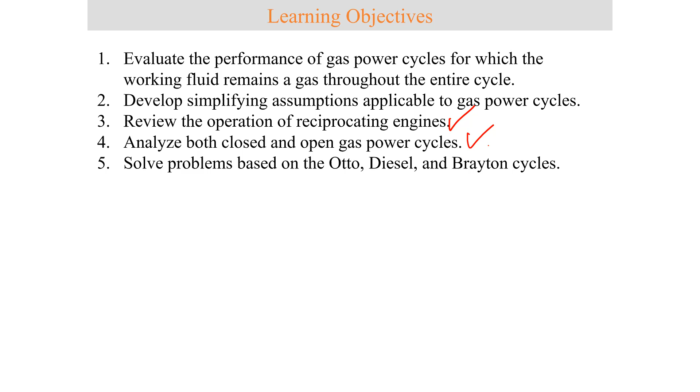We're also going to review the operation of reciprocating engines as well as analyze both closed and open gas power cycles, and then solve problems based on the Otto, the diesel, and the Brayton cycle.

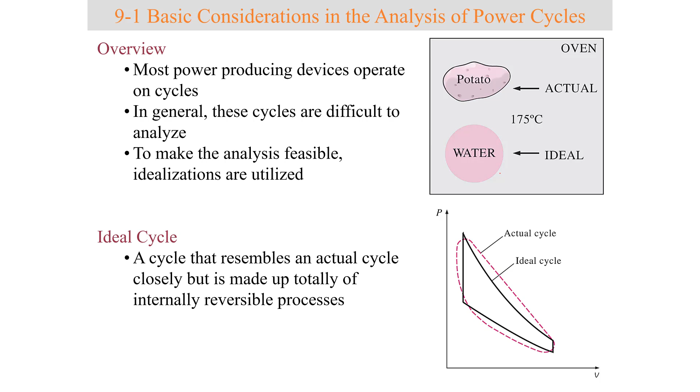So a little bit of an overview. Most power producing devices operate on cycles. In general, these cycles are difficult to analyze. So to make the analysis feasible, idealizations are utilized. The ideal cycle is a cycle that resembles an actual cycle closely, but it's made up of internally reversible processes.

If you recall, the thermal efficiency of a heat engine is the ratio of the net work produced by the engine to the total heat input. And then the Carnot cycle has the highest efficiency of all heat engines operating between the same temperature levels. No cycle can be more efficient than the Carnot cycle.

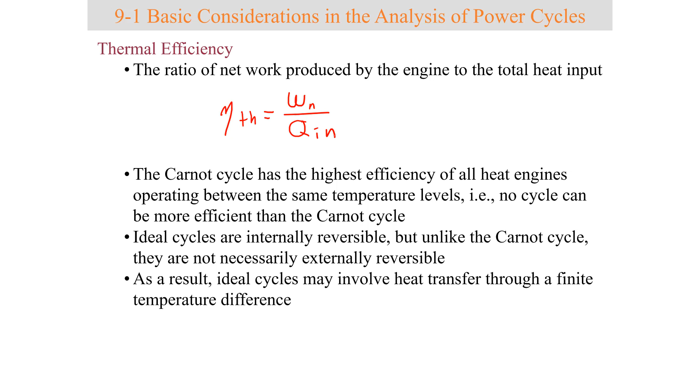Ideal cycles are internally reversible, but unlike the Carnot cycle, they are not necessarily externally reversible. So as a result, ideal cycles may involve heat transfer through a finite temperature difference. The following idealizations and simplifications are commonly employed in the analysis of power cycles. 1, the cycle does not involve any friction, so the working fluid does not experience any pressure drop as it flows in pipes or devices.

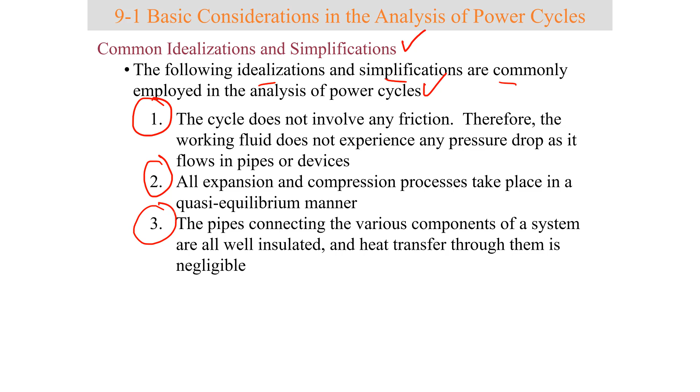Number 2, all expansion and compression processes take place in a quasi-equilibrium manner. And number 3, the pipes connecting the various components of a system are well insulated, and heat transfer through the medium is negligible.

Also, property diagrams. In the analysis of cycles, property diagrams such as PV and TS diagrams serve as valuable aids. Both on the PV and TS diagrams, the area enclosed by the process curves of a cycle represents the net work produced during the cycle, which is equivalent to the net heat transfer for the cycle.

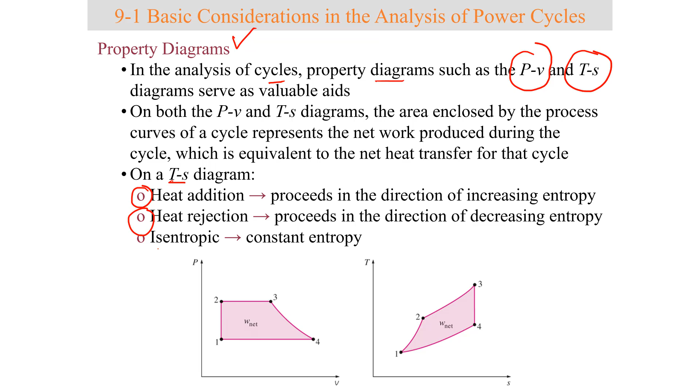So on a TS diagram, heat addition proceeds in the direction of increasing entropy. Heat rejection proceeds in the direction of decreasing entropy since heat carries entropy away. The isentropic processes are represented by a constant entropy line.

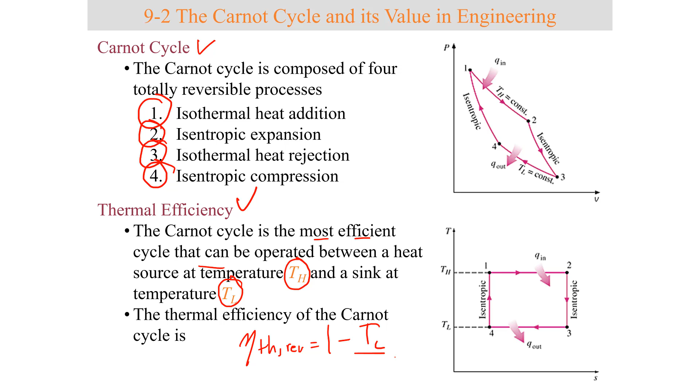Carnot cycle. If you recall, the Carnot cycle is composed of 4 totally reversible processes: isothermal heat addition, isentropic expansion, isothermal heat rejection, and isentropic compression. The Carnot cycle is the most efficient cycle that can be operated between a heat source at TH and a sink at temperature TL. So the thermal efficiency of a Carnot cycle can be represented as a function of the temperature of the sink and the temperature of the heat source.

What's the value of the Carnot cycle? Well, reversible isothermal heat transfer is very difficult to achieve. It is not practical to build an engine that would operate on a cycle that closely approximates the Carnot cycle. So the value of the Carnot cycle comes from it being a standard against which actual and ideal cycles can be compared.

The thermal efficiency relation conveys an important message that is equally applicable to both ideal and actual cycles, and it reads as the following. Thermal efficiency increases with an increase in the average temperature at which heat is supplied to the system, or with a decrease in the average temperature at which heat is rejected from the system. Right, so if I have the Carnot efficiency, 1 minus TL over TH, the higher the TH, the higher the efficiency, and the lower the TL, the higher the efficiency.

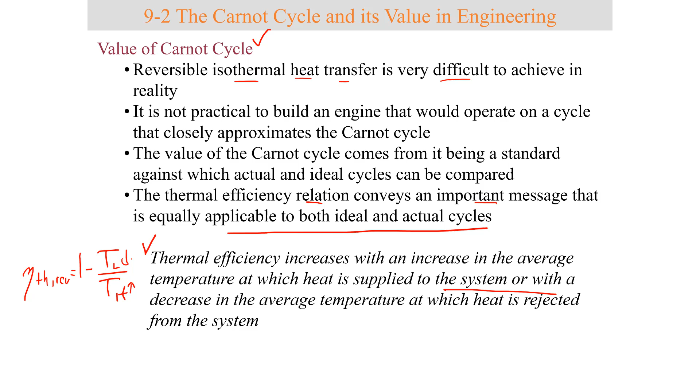Also, in gas power cycles, we're going to go over something called air standard assumptions. And the air standard assumptions are the following. In gas power cycles, the working fluid remains a gas throughout the entire cycle. In all gas cycles, energy is provided by burning a fuel within a system boundary. The composition of the working fluid changes from air and fuel to combustion gases during the course of the cycle.

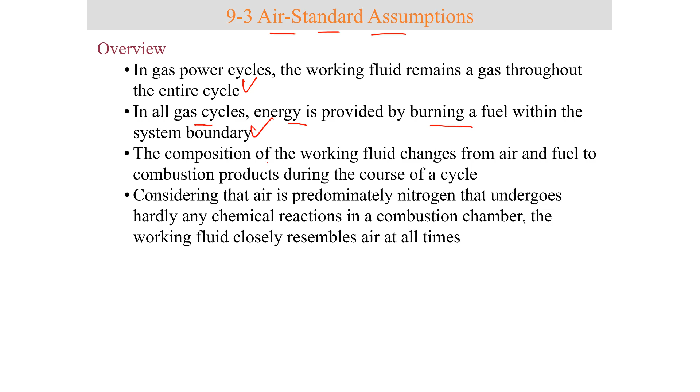So considering that air is predominantly nitrogen that undergoes hardly any chemical reactions in the combustion chamber, the working fluid closely resembles air at all times. So to simplify the analysis of gas power cycles, we utilize the following approximations, which are known as the air standard assumptions. 1, the working fluid is air, which continuously circulates in a closed loop and always behaves as an ideal gas. Number 2, all of the processes that make up the cycle are internally reversible.

Number 3, the combustion process is replaced by a heat addition process from an external source. And number 4, the exhaust process is replaced by a heat rejection process that restores the working fluid to its initial state. We're going to go over this in more detail in a little while.

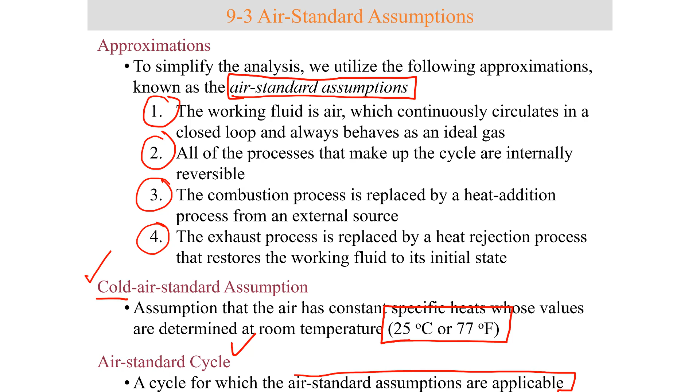We could take this a step further and call it cold air standard assumptions. That takes the assumptions a step further, asserting that the air has constant specific heats whose values are determined at room temperature, 25 C or 77 Fahrenheit. And an air standard cycle is a cycle for which the air standard assumptions are applicable, which are going to be a good chunk of the stuff that we're doing in this chapter.

Okay, let's go ahead and do an example problem. An air standard cycle with constant specific heats at room temperature, right? So that would be cold air standard assumptions.

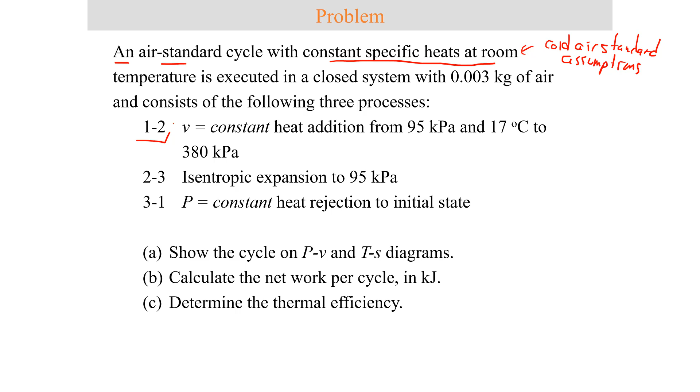So an air standard cycle with constant specific heats at room temperature is executed in a closed system with 0.003 kilograms of air and consists of the following 3 processes. Process 1 to 2, constant volume heat addition from 95 kilopascals and 17 C to 380 kilopascals. Process 2 to 3, isentropic expansion to 95 kilopascals, and process 3 to 1, constant pressure heat rejection to the

initial state. We want to show the cycle on a PV and TS diagram, calculate the net work per cycle, and determine the thermal efficiency. So one major assumption that we're going to draw is that we are going to use cold air standard assumptions. So let's go to the next slide and figure out part A, which is showing the process on PV and TS diagrams.

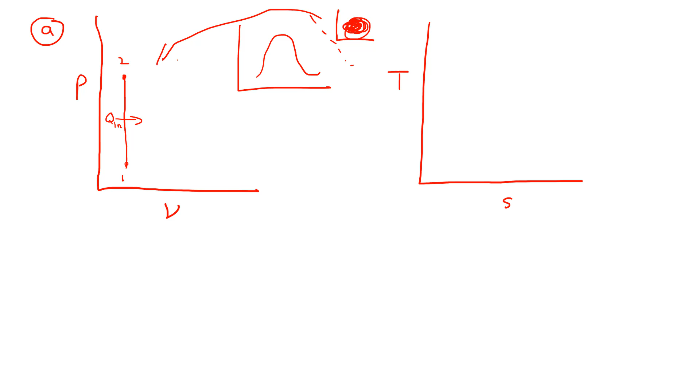So if I take a graph in this way, that's where this graph comes from. Okay, so we're way in the superheated vapor region, which is way in this ideal gas region for air. So no need to draw a saturation curve. So again, process 1 to 2 is constant volume. And as heat addition, I'm going to have an increase in temperature as well as an increase in entropy due to heat addition. So that'll be process 1 to 2 in this direction with heat addition.

Process 2 to 3 is isentropic expansion. So I'm going to be expanding to state 3, where this is going to be work out to state 3. And over here, I would have isentropic expansion, so it would be constant entropy, state 2 to state 3 with work out. And then finally, state 3 to state 1 is constant pressure heat rejection. So then the temperature would decrease and the entropy would also decrease, giving me my PV and my TS diagram.

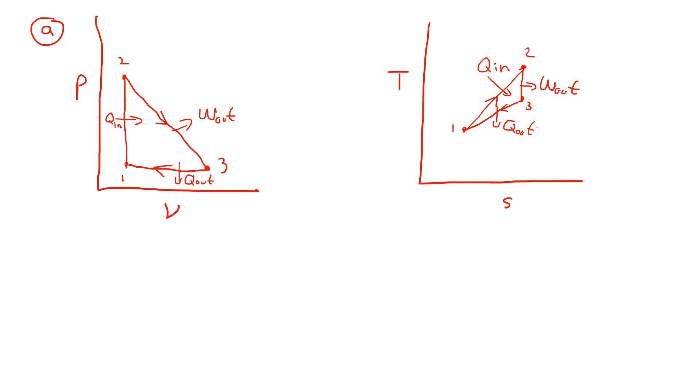So then part B is asking you to calculate the net work for the cycle. How do I calculate the net work for the cycle? First thing I'm going to do is a first law around the cycle. I get energy in minus energy out equals delta E system. Delta E system is 0 because this is a cycle, so everything returns to the initial state. So the only energy transfer terms crossing the boundary would be heat transfer and work. So energy in is Q in, energy out is work out and Q out. So my work out would equal Q in minus Q out.

So if I'm going to compute this work out as a function of Q in and Q out, I need to do a first law analysis now around the process. A lot of times when we're doing cycle analyses, you're going to have to vary the boundaries for which you do your first law. The first one I did was a first law around the cycle. Now we're going to move on to a first law around the process. For the two heat transfer processes, process 1 to 2 is heat in, and process 3 to 1 is heat out.

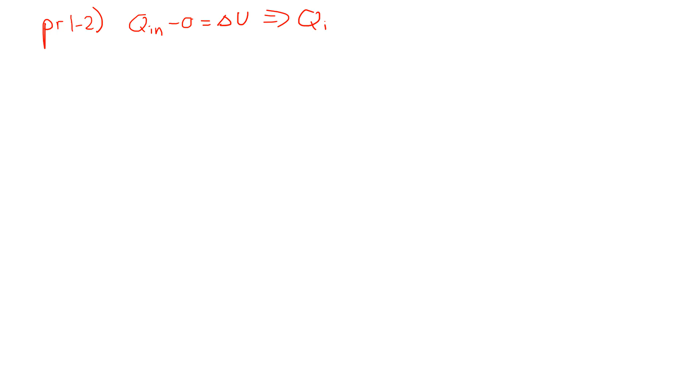So if I do a first law analysis for Q in, that is a constant volume heat addition. So I have E in, Q, minus E out, which is 0, equals the change in energy of the system. So I get that Q in is equal to mass times U2 minus U1. And for process 3 to 1, I get energy in minus energy out. This is a constant pressure heat rejection. So there is going to be some change in volume, and it's at constant pressure, so it'll be P delta V. That would be the boundary work at constant pressure, equals delta U.

So in this case, my Q out will equal mass times delta U plus P delta V, which equals delta H. So my Q out will equal mass times H2 minus H1. So with my analysis of the cycle, I first did a first law analysis around the cycle, then around the processes. Now the next step is to evaluate the properties in each state so that I can get U1, U2, H3 and H1. So I actually made a mistake here. That should be H3 minus H1.

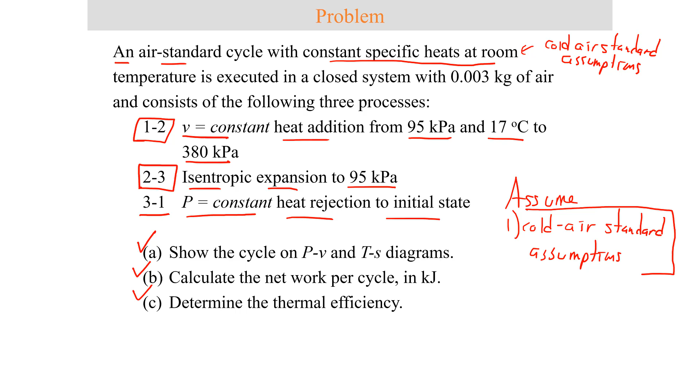For ideal gas, the change in enthalpy can be approximated as Cp delta T for constant specific heats, and delta U can be approximated as Cv delta T for internal energy. And if you remember back at the problem statement, we're assuming cold air standard assumptions. Cold air standard assumptions basically means that your specific heat can be evaluated at room temperature.

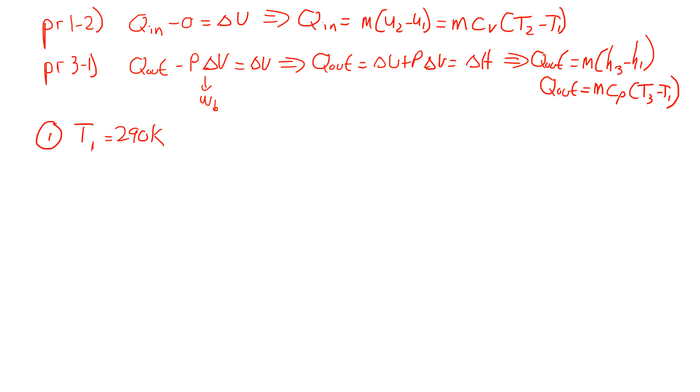So with T1, I know T1, and I want to go ahead and get T2. So I'm going to analyze the process from 1 to 2, which is constant volume. So what I need to do is what I call follow the process line. If I want to get the temperature at T2, I follow from T1 to T2, which is constant volume. So if I use the ideal gas law, I put on one side everything that's changing, which is pressure and temperature, and on the other side everything that's remaining constant, which is R over nu.

So that means that P1 over T1 equals P2 over T2. So I can use this to solve for T2 as P2 over P1 times T1. I have P2, I have P1, I have T1, I put it all in Kelvin, I can get T2 is 1160 Kelvin. So now that I have T1 and T2, the next thing I need is T3. So I'm going to go back and analyze. For state 2, I found that the temperature is 1160 Kelvin.

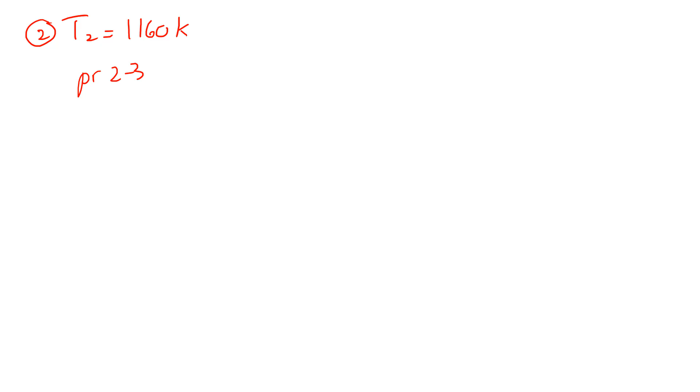And now I analyze process 2 to 3. So I go from state 2 to state 3, which is isentropic. Since the process 2 to 3 is isentropic, I need to find a relationship that allows me to use the assumptions that this is an ideal gas with constant specific heats undergoing an isentropic process. So if you recall, that would allow me to use the following correlation: T2 over T3 equals P2 over P3 to the k minus 1 over k.

Now, it so happens that P3 is equal to P1, so I can make the substitution of P3 equal to P1 here, and then I just calculate T3 knowing T2, and I get T3 is 840 Kelvin. So again, if you take this step by step, what I did was first a first law around the cycle, and I ended up finding my unknown, work out, as a function of Q in and Q out. In order to get Q in and Q out, I need to analyze the processes.

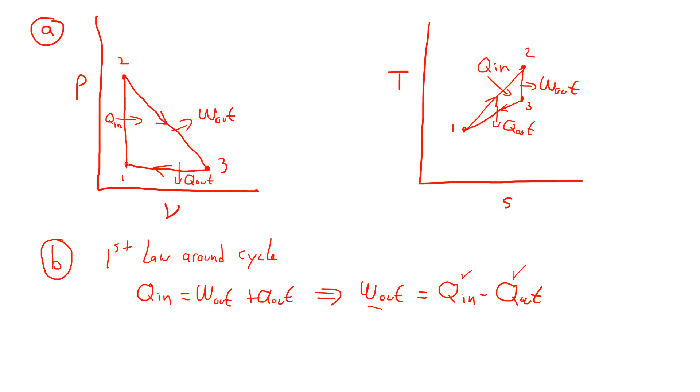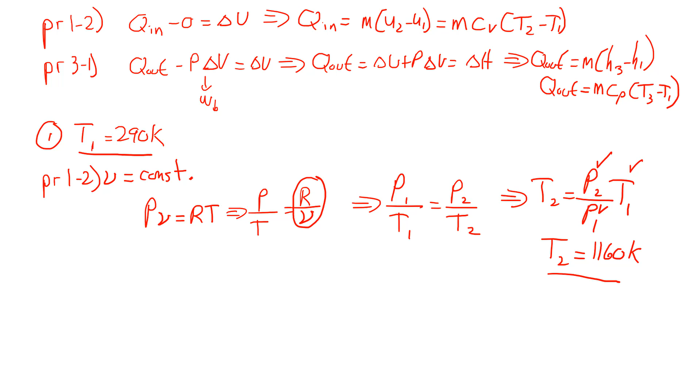So I did a first law analysis on process 1 to 2 and 3 to 1, and ended up getting Q in and Q out as a function of temperature, since it's constant specific heats. Then I need to find the temperature at each state, starting at the state where they give me the temperature, which is state 1. I follow a process line from state 1 to state 2. That process is defined at constant volume. So I use the ideal gas law for a constant volume process to compute T2.

Then to go from state 2 to state 3, that process is isentropic, so I have to find the correlation for analyzing an ideal gas undergoing an isentropic process with constant specific heats. So the trick is making sure that you follow the process lines and you understand how to associate the assumptions for the process with the correct correlation.

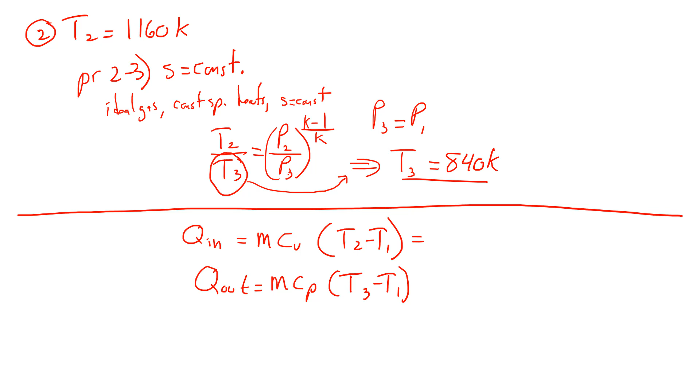Now that we have all these, I can compute my Q in as mCv T2 minus T1, and my Q out as mCp T3 minus T1. You plug in your numbers, get about 2.07 kilojoules for Q in, about 1.65 kilojoules for Q out, and then I can figure out that my work net is equal to Q in minus Q out, which equals 0.42 kilojoules.

And then we can move on to the last part of the problem, which is part C. I'll go ahead and do it in this corner of the slide. So thermal efficiency is equal to net work over Q in. My net work is 0.42 and my Q in is 2.07. So my efficiency is approximately 20%.